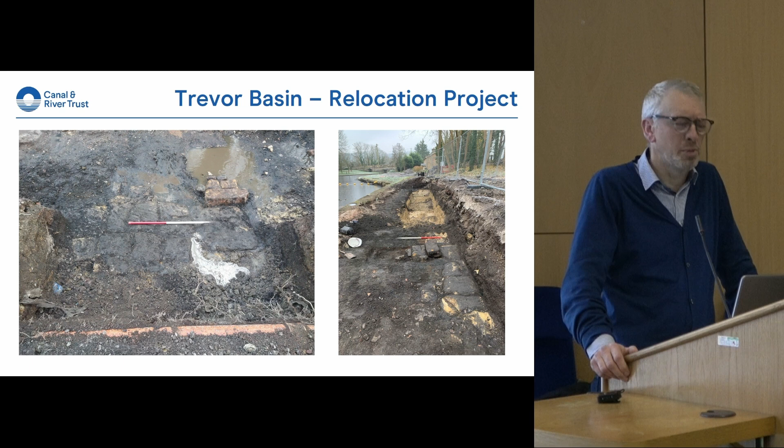And as we moved along the wharf, we found some more interesting finds. On the left-hand side, we think - I think we probably still do - it's currently in conservation with the very experienced Rowan Taylor, a blacksmith who works at the Ellesmere Yard site in Canal and River Trust. So what we think is part of what was the Ruabon tramway rail - a piece of rail with a fish plate you can see at the bottom there.

We took out those stones. We've documented all that material - you can see it on the left-hand side just before it was ready for transportation to its safer site. As I say, we had lots of conversations with CADW at the time, and CPAT were involved in those conversations. And we decided that we were going to put those stones back in some way, shape, or form.

It's quite complicated because it's going to be a wharf area where we need disabled access, which is quite tricky really. Imagine these stones going back down - they're not going to create a surface that one could easily access. So we're currently in negotiation, but we found a sort of way through all of that. My view is it's a little bit contrived, but I think sometimes these things always are. Nevertheless, we are going to put some of those stones back.

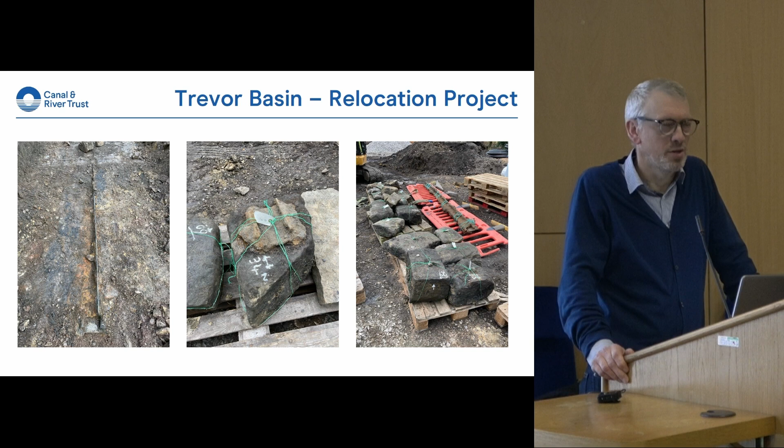And the rail, we think we're going to probably put in an education centre that's kind of due to be given permission, let's say, in the World Heritage Site. So watch this space. But my problems are usually these problems, which is a failed wash wall, usually. Now, usually I turn up at a failed wash wall and think, okay, we can just rebuild that. In this case, that's kind of slightly more tricky because this is a scheduled monument wash wall in a World Heritage Site. It's a conservation area and all the things I've just said.

So to rebuild this wash wall usually requires CADW intervention and a load of stakeholders to understand how we go about doing that. But we managed to get through all that, and as we started to rebuild this bit of wash wall, we realised there was a significant problem with it - it was essentially lying on what we describe as a clay foundation, which was partly the reason for its collapse, I think.

There was some surcharge there as well, but we think it's partly due to a bit of what we call prop wash, where boats are moored at the side of this wall and their propellers are running. Essentially that creates a wash that pulls clay out from underneath the wall, and therefore you get the subsidence that you just saw.

So we rebuilt this wall, and with CADW's permission, we put in a reasonably sized concrete foundation. You can see that concrete foundation on the left-hand side there.

But in that process, we realised there were a number of other failures. If you think about Trevor Basin, it doesn't look it, but it's actually got quite a lot of water in it. Water tends to do a really good job of holding historic structures upright, and as soon as you take the water out, you take the pressure away, and the walls go, 'actually, that's been holding us up, Mark, so we're going to fall down.' That started to happen en masse, as I'm sure Chris will attest. When we were there, we were actually seeing stones literally fall in real time while we were standing in the navigation.

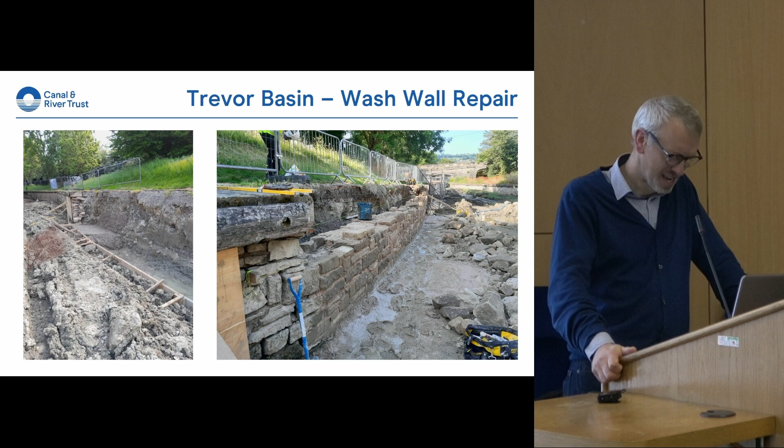So we started to think about how we could extend the scope of these works and maybe use this opportunity. We don't get the water out of a place like Trevor Basin very often - it's quite cumbersome to do. You've got to get fish rescue, you've got to do a whole host of things, put a dam in - it's quite complicated. So while we were in there, we thought we'd actually do a bit more work.

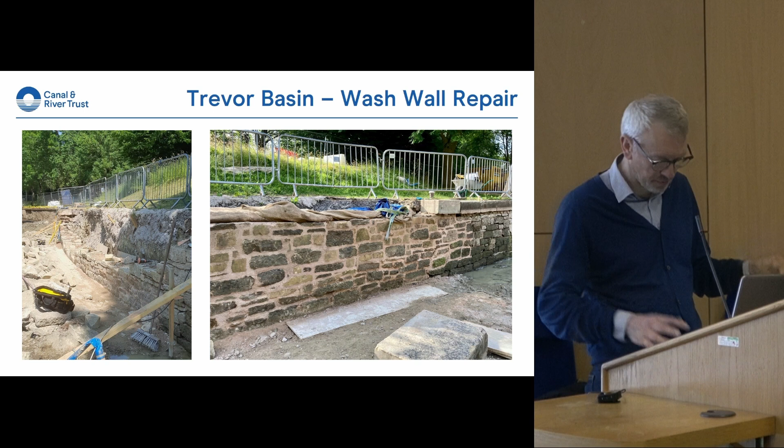So this is essentially the rebuilding of the bit that was broken, if you like. But then on the other side, you've got what I described at the time and still describe now as probably one of the best 18th century wash walls I've ever seen in the canal. This is on the opposite side of where we just saw that collapse, so still in Trevor Basin - a limestone wall with its original non-hydraulic mortar, which is quite surprising given it's got water on it all the time, and it's still in reasonably good condition.

But the reason for that is it sits on bedrock rather than on clay. So it's got a really nice batter on it, and it's been stable over all these years, retaining its form. Whereas on the other side of the basin, literally less than 10 meters away, you've got clay foundations - on the peninsula too. And what's happening there is that those clay foundations have been washed away.

As you can see, you've got lots of collapses on the peninsula and on the right-hand side where we were actually doing the work. So we got CPAT in, or Heneb, to do some strata work for us, and Chris came in with some other guys - I think Yvonne was involved at the time. We also got Matt in to do some photogrammetry for us. So while we had the water out, we tried to do as much as we could to gain as much knowledge as possible about this structure and what we'd need to do to put it right in the immediate term, and potentially what it might need in the long term.

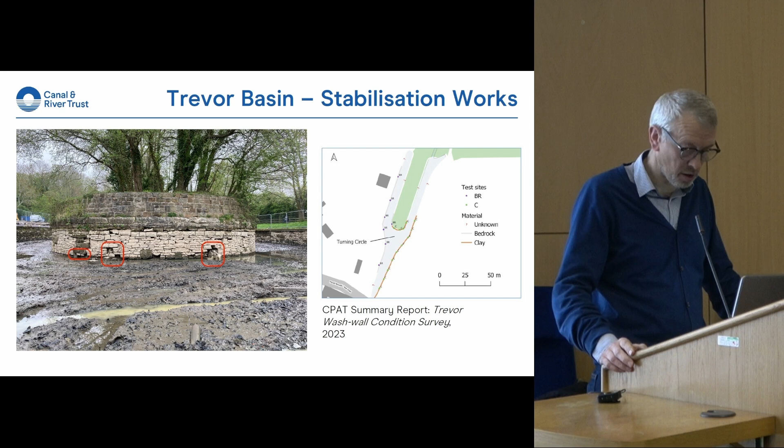You can see the gap underneath the wall, I've highlighted it there. That's just alongside where you can see the edge of the collapse, on the right hand side there. You can see underneath, there's a sort of void, and that void is where we needed to focus our attention based on some of the information that CPAT were giving us at the time.

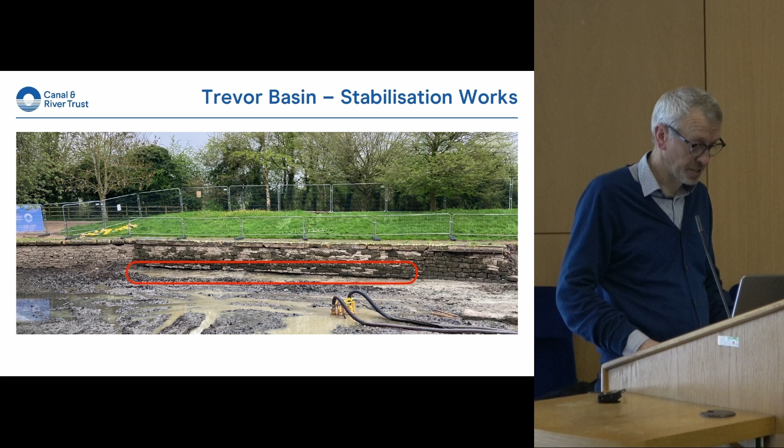The reason for that - and this is largely the problem on the other side of the site where we were doing the relocation works - is that the canal, over the 200-year period of being there, constantly has to be dredged. The dredgings don't usually go far, they usually just get piled onto the land, so what you've got is made-up land getting higher and higher and higher.

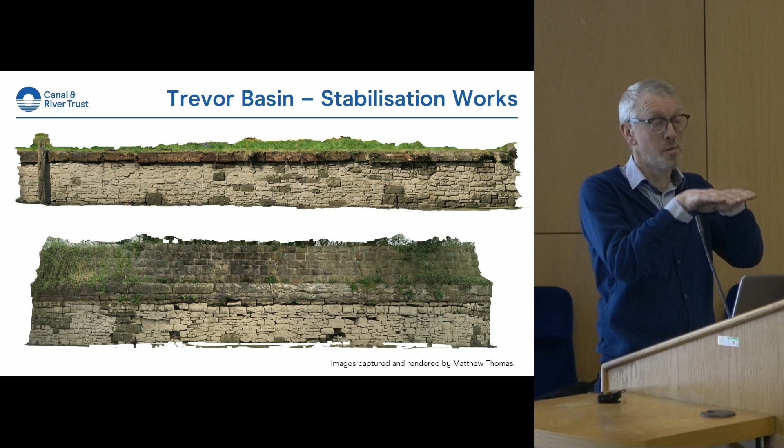Essentially this wall has to keep up with that made-up land to kind of keep it there. That's why, and Chris will vouch for this, when we actually hit the wharf on the relocation stuff we were quite surprised - it was almost at water level, so there was no freeboard at all. They were operating the wharf directly at water level, with no gap as freeboard like we describe now.

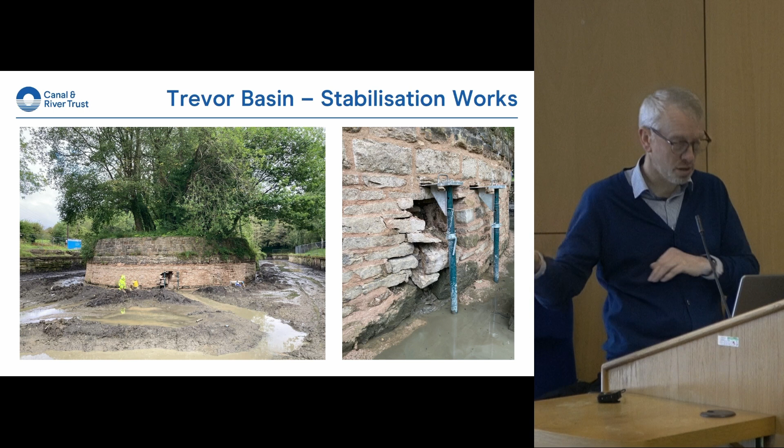So these stabilisation works - we extended the scope significantly. It's significant time, significant cost. If you imagine, this is one of the busiest canals on the network, convincing all the powers that be - not only the executive at Canal and River Trust, but also business owners like Anglo-Welsh and a whole host of others who operate in this area - that we're going to have to keep the water out because we need to repair this thing, is sometimes really difficult. So you're managing multiple stakeholders all the time when doing this work, as well as people like Cadw, ICOMOS UK and UNESCO, the obvious ones involved in the inscription for the World Heritage Site.

The solution was what I'd call a very conservation-friendly solution, dreamt up by myself and an engineer: essentially we put SoluForm bags as a sort of makeshift concrete wall in front of it. I don't know whether you know SoluForm bags - they're essentially concrete inside a Hessian sack, and when you put them in water they solidify. We put that wall in a sort of brick bond in front of it, then put bentonite clay pellets behind that - so we reinforced the clay, but also put almost like a concrete stopper, essentially creating a fillet.

That's a really good way of providing a temporary-permanent solution to a problem where we would otherwise have had to be relatively invasive to do the work. Taking down that entire scheduled monument at that end of the basin would have been costly, and I suspect Cadw wouldn't have been particularly happy with us doing that - it's not an easy thing to do. So I think they were, at the time, really happy with this solution.

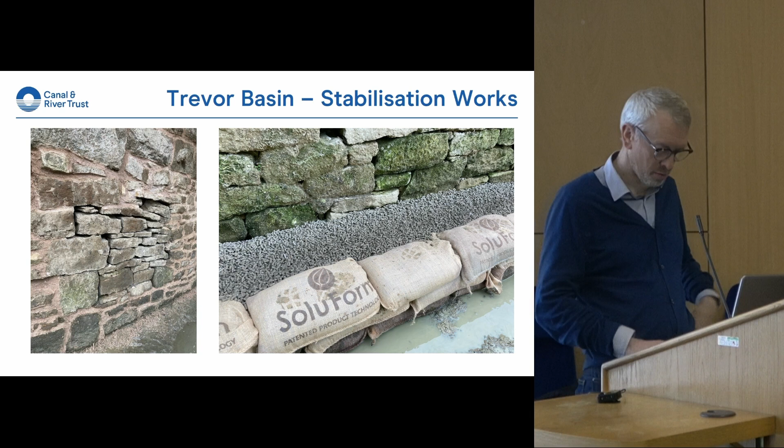I've used this solution on a number of occasions, not necessarily in places as highly designated as the World Heritage Site, but essentially it provides us with a really good, 100% reversible solution to resolving that particular problem of collapsing wash walls. And there's the wall - the bit I showed you at the beginning - completely redone with its new oak fenders and so on.

If you imagine one of the problems we have - it might not seem obvious, but if you were standing in Trevor Basin, you'd probably notice from the sound they make - narrowboats generally look to most people like quite benign craft. They only move at around 5 miles an hour and don't make a lot of noise. But believe me, when they hit a wall, they're usually 15-20 tons, and they give walls a good bang when they do. They usually cause quite a lot of damage, hence the need for things like these oak fenders, which at least try to provide a buffer to keep this scheduled monument in the condition Cadw expect us to keep it in.

Now onto the bigger bit, if you like.

So the world-famous Pontcysyllte Aqueduct, which is recently described by UNESCO as within this field, so industrial archaeology, not only the best in the UK or best in England and Wales, but best in the world. I think in a sense Wrexham, I'm sure everyone in Wrexham is reasonably proud of the football stadium next door or the football team next door.

But I think this is a significant piece of civil engineering, not just in England and Wales, but in the world. We have lots of people coming from all over the world to see this structure, and it's really important that we maintain it. It's a Canal and River Trust site, but essentially people in Wrexham expect us to maintain it in the way that it should be maintained. And here it is - the very famous piece of treasure, as I'm describing it, because I think it's partially made of metals, 200 years old. It kind of fits that significance criteria really well.

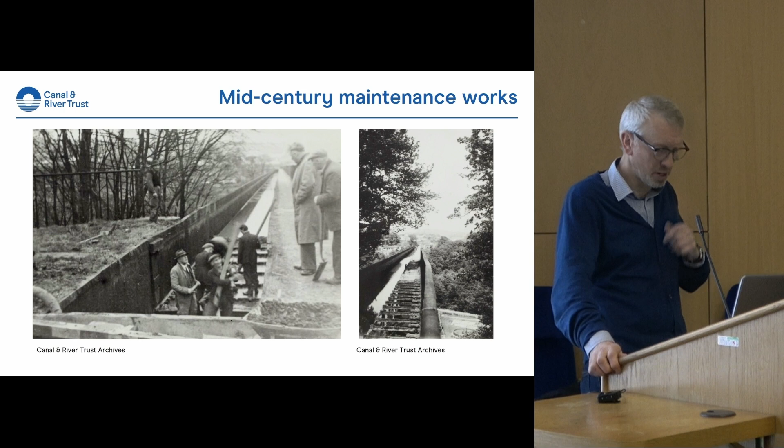You can see that it's dewatered to some extent, and so repairs were taking place. On the right-hand side, you can see that the towpath has lost all its what we call its dish plates, so it was kind of going through some repair. I think that photograph's a little bit later, from the early 60s.

And then restoration work was done in the 1980s. Ove Arup did some of that work with British Waterways Board. And then in 2003, 2004 - remember, it was a scheduled monument at this point, but it wasn't a World Heritage Site - it went through a significant restoration. Some people locally might even remember it; it was scaffolded all the way across its entire length. It was largely completed by this contractor, a guy called RTT, Richard Thomas, with Canal and River Trust, with British Waterways engineers.

It went through a really significant restoration, repairing quite a lot of stuff that had gone by the wayside. I think it saved it at this point. So we're talking early 21st century.

Interestingly, you can see Richard actually standing on the towpath there. There's a level change, it might not seem obvious, but there's a level change. He's standing on the towpath, and the dish plates - the steel plates in between the cantilevered cross members - were paid for by Cadw, actually, a significant amount. There's about 302 of those across the whole aqueduct. Steel dish plates that have a rise in them, so when water gets onto them, it's able to run away and back into the canal.

It shows you that they were keen to ensure that they supported us in repairing this structure in the best way that we could, because it genuinely can easily suck up the GDP of a small country every time you look at it, to be honest with you.

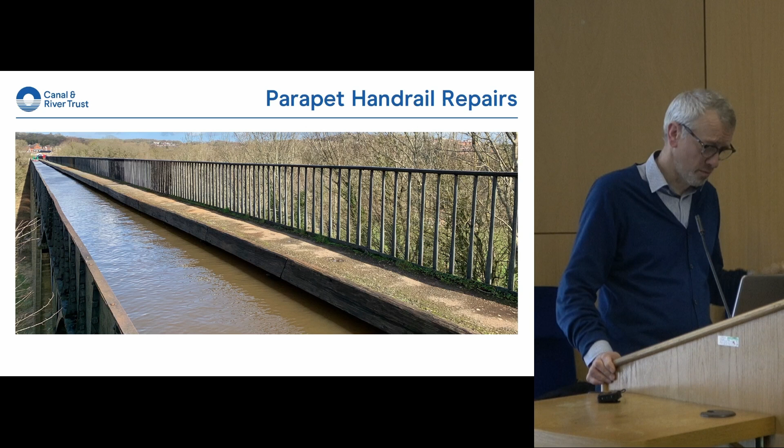As I said earlier, it's actually the parapet handrail that causes us most of our difficulty in terms of restoration, and we have to replace a lot of the handrails now. You can see here a scenario where we try to keep most of the uprights if we can. We weld small pieces on top of them, but we replace the long piece of handrail. It's a long and time-consuming task.

We do it in January, in between January and March. I was thinking about what Ian said earlier, complaining about the wind at Boris Quarry - I can assure you, I'll trade that wind for you any day of the week. On top of the aqueduct in January, when it's usually snowing, raining, and windy all in the same minute, it can be a really difficult environment to work in.

But we're doing hot works at that point, so we've got welding equipment, we've got boats there. We're all strapped to the boats to make sure we don't fall off. It is very, very dangerous work.

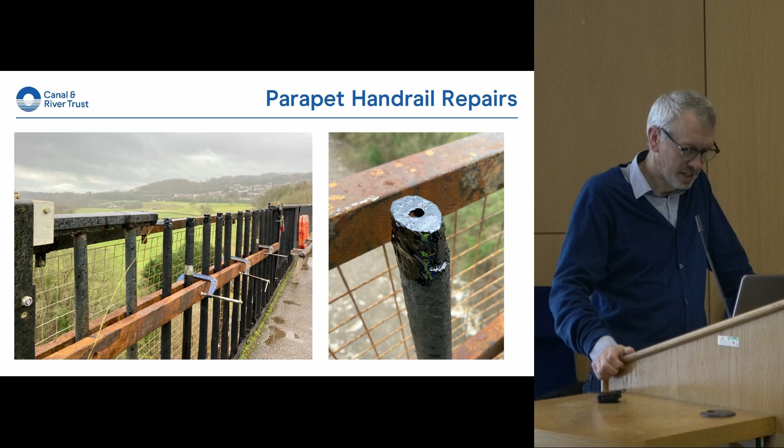You can see here a sort of indication of what I was just describing. Just to lift one of those handrails - I've got one, a small part of it, in the enterprise zone down the corridor there - they are extremely heavy. It takes 4 guys to lift one of those handrails to offer them up to be situated on top of the uprights.

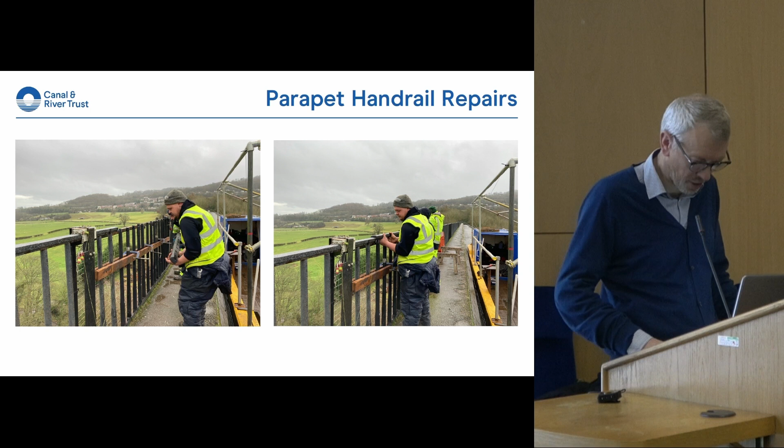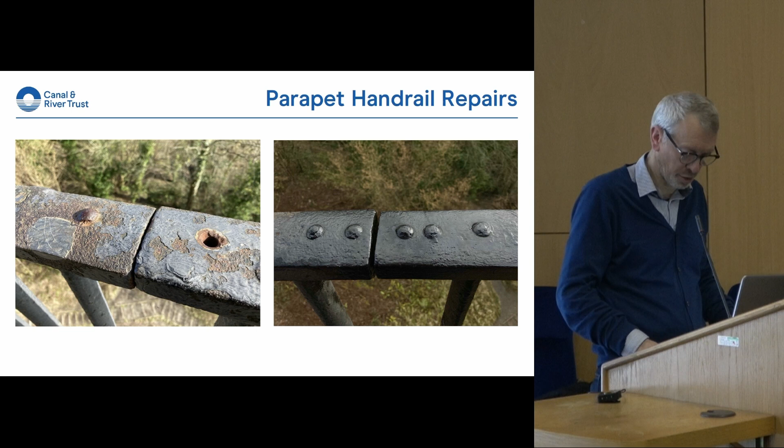And that's because in the summertime, the sun heats it up, and then those expansion joints contract. They kind of butt up against each other, it buckles, and causes quite a lot of damage to the actual uprights or down below. So we're trying to extend those expansion joints and put in a greater slip underneath - a strip that clamps those two together, allowing the expansion joint to work much better. So essentially, before and after.

COVID kind of complicated this bit, but usually every 5 or 10 years we do what we call a principal inspection. That's where we take the water out of it, shut it down, and crawl all over it with hundreds of engineers, making sure that we're sending people in boats over a structure that's 126 feet in the air. We have to be sure that those boats aren't going to fall off there, or anyone's going to fall off there. So we have to keep replacing things.

The picture here - I've got a couple of them down in the enterprise zone - these bolts that bolt the trough together. We often refer to the Pontcysyllte aqueduct as essentially a very big Meccano set.

Oakum on as a sort of water sealing agent. But the ones on the left-hand side, those bolts, they might have been from the original, actually, because they're extremely worn down. But the ones I've got with me today were taken off in 2003, 2004, and I think they were from about the 1860s. And then you've got a brand new one on the far side here. They're wrought iron - we have to have each of these made in wrought iron. It's, again, a very expensive process.

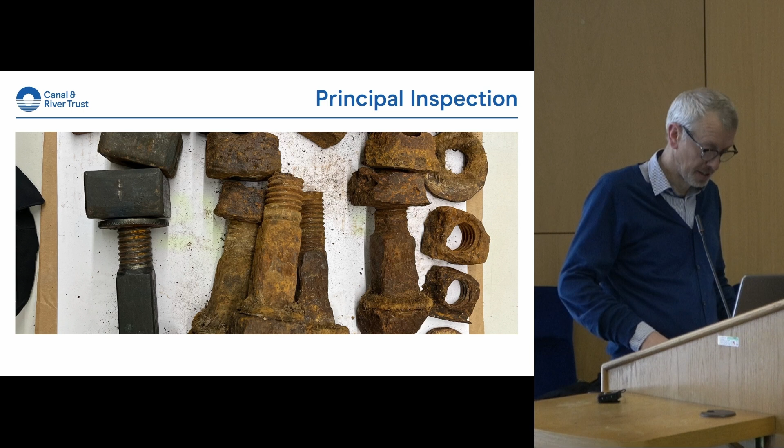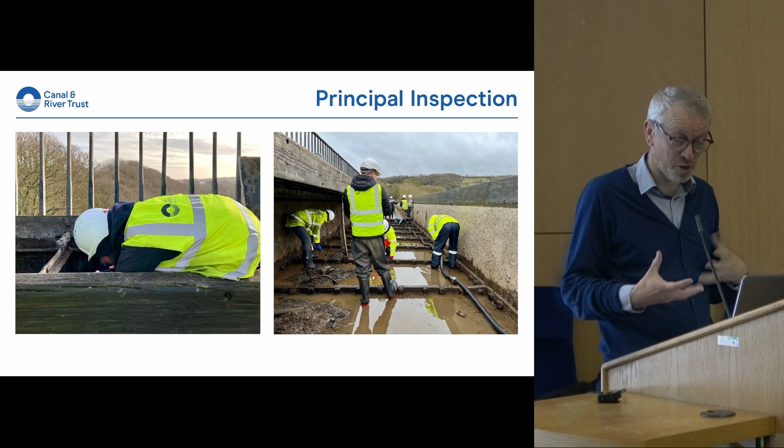Anyway, so this is us crawling all over the structure, once we've taken the water out. We're looking at lots of different things, and quite famously on the right-hand side, we're looking at the plug. It's essentially a very big bath - you pull the plug, all the water falls out. That's kind of how it works.

But on the left-hand side, we're looking - you can just about see it actually. Look in the top left-hand corner, you can see what we call the ledger angle. Can you see how that's snapped? Can you see the break? Top left-hand corner. So that's the thing we're looking at in this instance - the ledger angles and these cross members. These cross members are the thing that keep the towpath, cantilevered over with some uprights that hold it up at periodic places all the way along the aqueduct. We're checking those for strength and for movement.

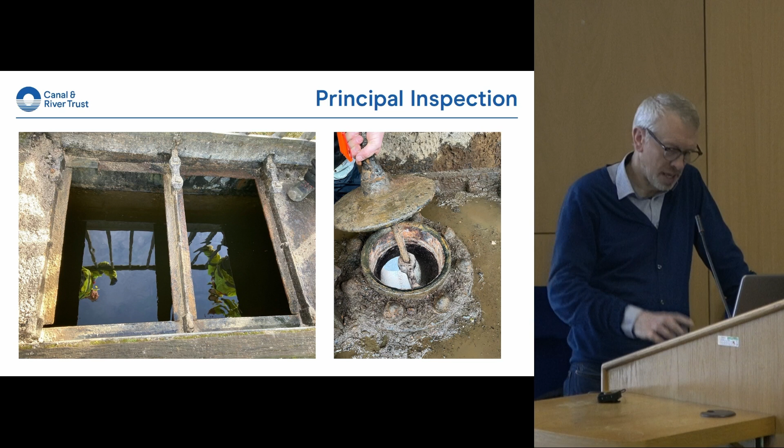And they're held in place - I'll get to it in a second - by a sort of wrought iron strap. They have been failing quite a lot. We've had to put some remedial works in there, temporary remedial works, to ensure that they don't move.

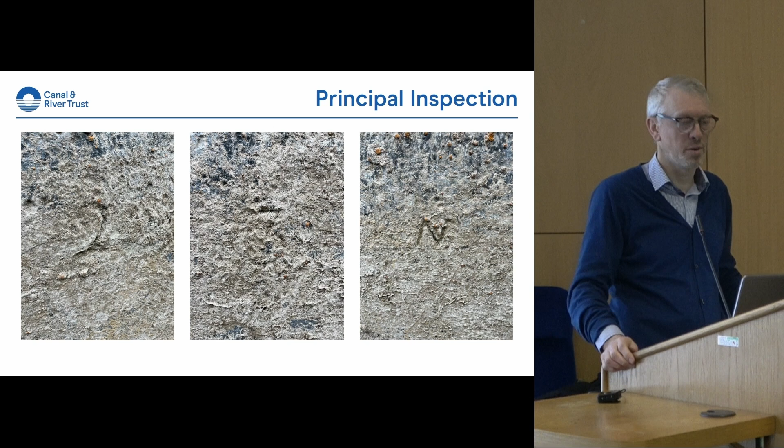Here's the sort of big Meccano set, if you like. These are the cast iron plates on the side of the aqueduct that are bolted together. You can see they've got numbers on, so it's literally built by numbers - you've got a 2, a 3, and then an N, meaning north. Essentially they were bringing them from the site there just to Plas Kynaston. It was being made literally very nearby and then brought to the site and bolted together. That's it - that's a very big Meccano set, is how I can describe it.

These are the things that surprise me, actually. I think Chris and Tim and all the people from Heneb who were involved in recording this - Matt did quite a lot of photogrammetry for us here, Yvonne came in and did some documentary work of the cast iron, some of the cast iron failures we got, which were casting errors or casting mistakes. But these are quite interesting, and it took us a long time to work out what these were. They look smaller than they actually are - I'll show you another slide where they appear quite bigger.

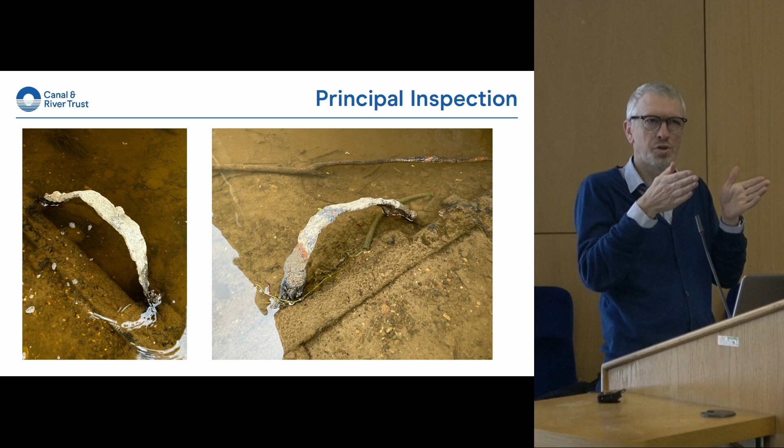They're essentially a wrought iron strap at the bottom of the aqueduct, directly underneath the towpath. And what they were - they appear now to be almost like a belt, if you like. Because they were wrought iron, they could be heated up and almost shaped around what we call a sole plate. That sole plate was the original towpath from 1805. The original towpath from 1805 wasn't cast iron, it was actually made of timber. Baron Dupin recorded in about 1816 that he walked across it and noted it being a timber towpath.

The cast iron rails, uprights and parapet handrail were cast iron, but the actual path, the cantilevered bit that you walk on, was actually made of timber. Obviously after about 25 years that would have failed. That's pretty much the case. We make lots of lock gates out of the same type of oak, and every 20 years we have to replace them. They deteriorate and fail.

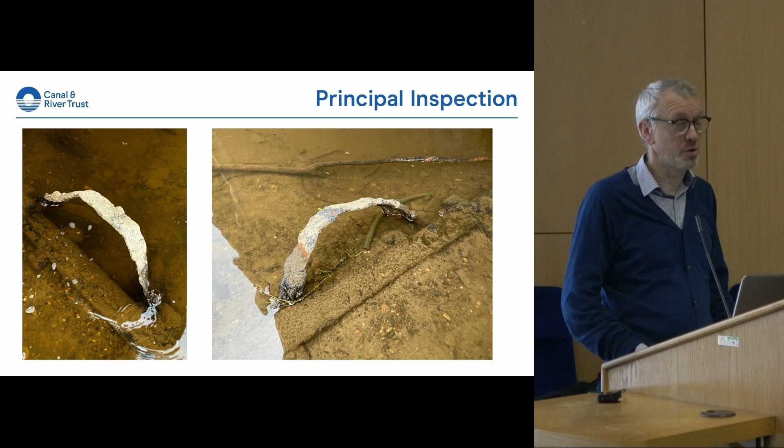I think what happened is because these bolted into the main trough, they were just left there, so the sole plate rotted around them. They left them all in situ, because taking them out would essentially cause a potential leak problem since they're bolted into the trough. So they've all essentially been left in place. I was quite surprised to see them, actually. They are very interesting elements, obviously original from the original construction, finished in 1805.

These are the wrought iron straps. If you look on the left-hand side, you can see one is actually broken, and they just hold the uprights in place. So they're wrought iron - they have to be made of wrought iron because they need to be quite flexible. If they were made of cast iron, they'd be too brittle and they would snap. So they have to be made of wrought iron, and they fail over a period of time.

I think this one's probably from the 1960s, these ones a little bit later. We had to find out which ones had failed, which ones were about to fail, and had to make some quick decisions, again with Cadw's approval, to temporarily chock those uprights up, as you can see here with these wooden chocks. It's really as down and dirty as conservation work gets - we actually clamped them together with G-clamps we bought from a hardware store. That's how down and dirty it is.

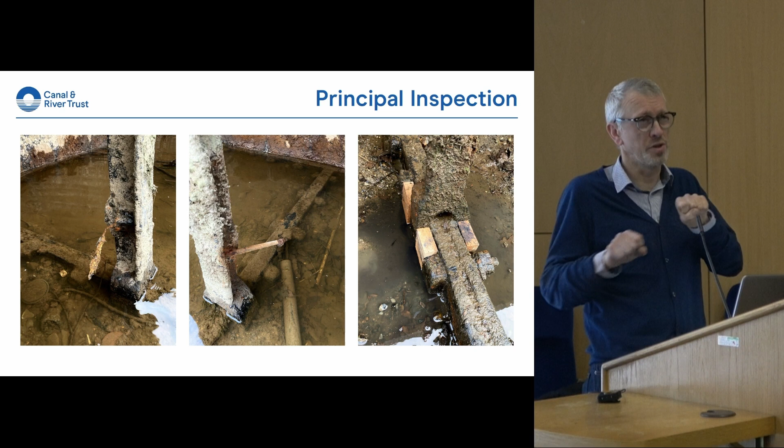So in a sense, it's just to give that upright a bit of stability over a period of time until we can get the water out again and put new ones. We've already had the wrought iron ones made, and we'll get the water out within a couple of years and put those back.

Everyone always asks me about the drain plug - it's this obsession, certainly in these parts. Even Ray was mentioning it earlier, talking to me about emptying the water out. The drain plug has been seized over a period of time, but again, while we were in there this time, we unseized it.

There is an issue of discharge from this canal. It's quite odd - I'm sure most of you know that the water that comes onto the Llangollen Canal, used to be the Ellesmere Canal, comes from Horseshoe Falls, so directly from the River Dee. But NRW do not like us putting that water back into the River Dee at this point, which is a bit odd because just up the way from here, there's a weir and we're discharging that water into the Dee almost 365 days a year when it overflows. So we're in a sort of dispute at the moment with NRW about a potential discharge license, but we think we have a license to do it. They don't think we do.

But essentially, next time we take the water out, we want to use the drain plug, so we unseized it because it's quite a spectacle when the water comes out of the aqueduct - it literally pours over the side. If you go on YouTube, you'll find many videos of the aqueduct being emptied via the plug.

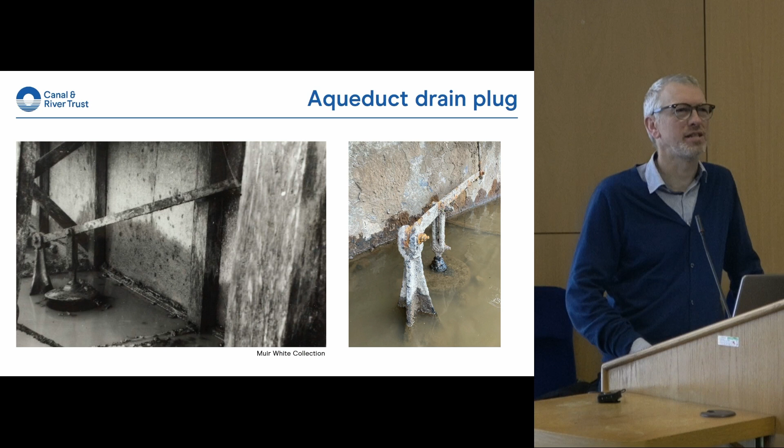I think Ray was telling me that - whose sister was it, Ray, who we were talking about? It was Prescott, John Prescott's sister, who'd emptied it at one point locally. So it's obviously like switching on the Christmas lights around here - you get to empty the plug on the aqueduct.

How am I doing for time?

So I just wanted to go back to Trevor and the public realm, because there's a bit we've been working on very recently. It's uncovered a bit more of what you might describe as traditional archaeology, rather than this 126 feet above ground archaeology that I've just been talking about. We're actually rerouting this path that runs down the side of the aqueduct and links with what we call the Tŷ Mawr Country Park path - a public footpath that runs directly under the aqueduct, goes to Tŷ Mawr Country Park.

This path, I'm sure those of you who have used it recently will attest, it's not the safest of paths to travel down. So we are rerouting it. We are going to put new material down.

It's just general erosion from rucksacks or people bumping into it. So we're redirecting the path to a certain place, and because we're doing that, we had some investigative work done that Chris did for us, again by Heneb, that looked at where we're going to put this path and what might be in its way. Chris found some quite interesting stuff that we kind of knew about but didn't really know about, and we still don't really know about it. That's the point about working with Heneb directly - they're starting to fill in the gaps in our knowledge, helping us understand the site and develop it better.